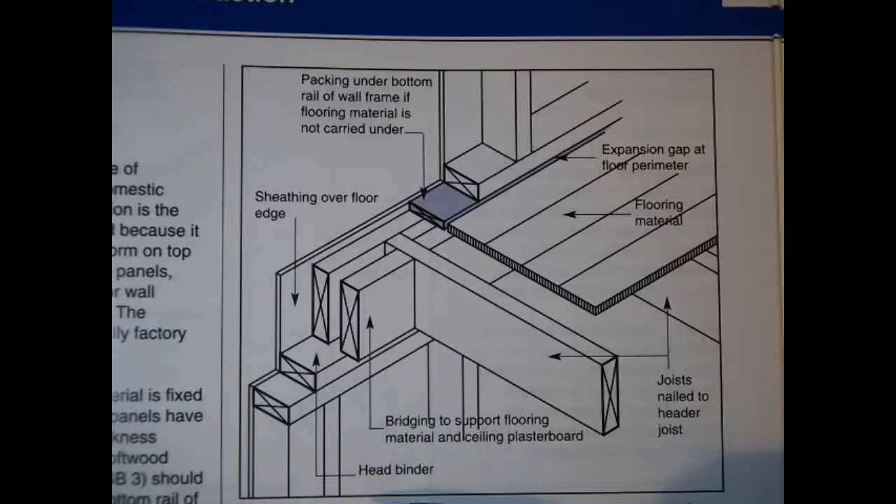So I'm going to start off looking at this three-dimensional image, which is very good for showing just how it all goes together. So we have our head binder, head plate, and we have our joist of the next floor, and you can see the sheathing is carried over the floor edge, resting on top of which we have, where the pen is now, our joist running to the header joist.

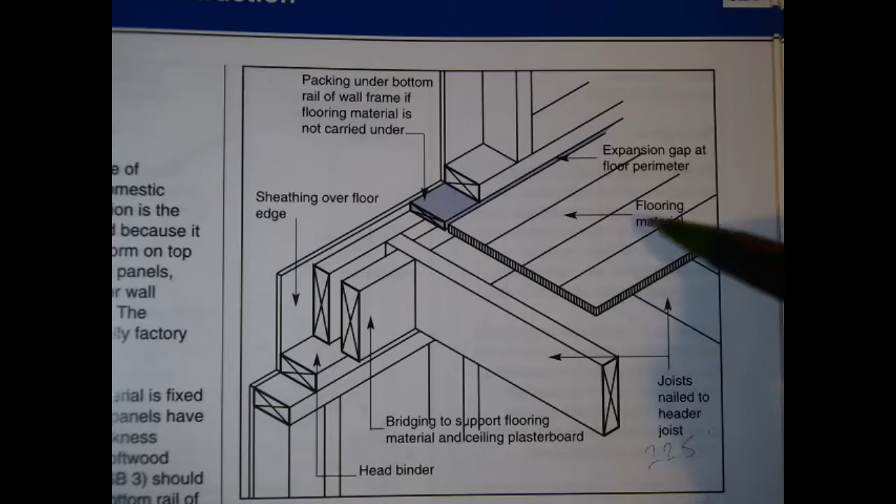Above that you have, well I'm showing it's 225 millimeters, which would be kind of standard. You've got a flooring material which could be tongue and groove, probably 18 millimeters in thickness, and if it doesn't continue out onto the edge, you can see there's a packing placed underneath the next timber frame above that. So very good detail here.

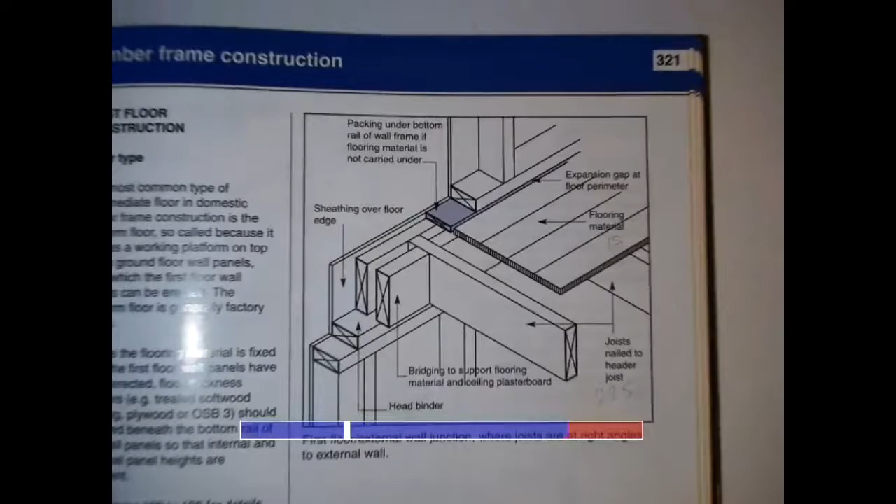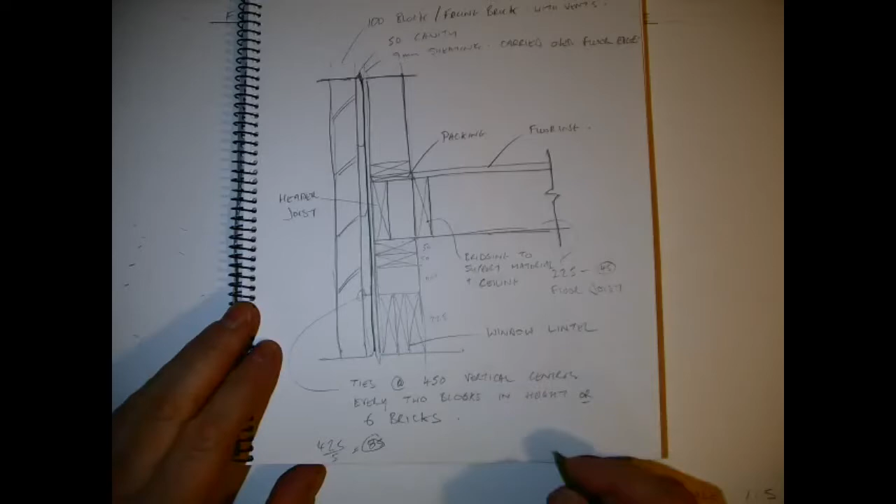If you need to go back to that there to take a look at it, it would be advisable. So starting off, what I'm going to do is I'm going to omit some details as well. In this I've got a sketch of how the whole thing would go together. You can see I want to draw at a scale of 1:5.

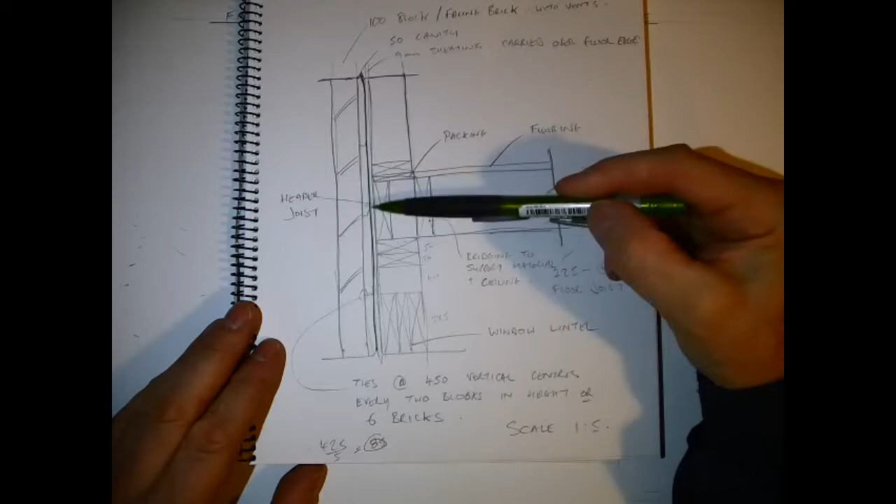The X's show the edges of the timbers, 100mm block or brick or whatever's out on the outside, 50mm cavity, our breather membrane or OSB board, and you can see each of these are shown in the three-dimensional drawing as well. Big difference here maybe would be that if there was a head of a window detail, there you can see I have drawn in the window lintel.

You may have that there, and I've put it in about roughly, I think it's 425mm from the bottom of the drawing on that there.

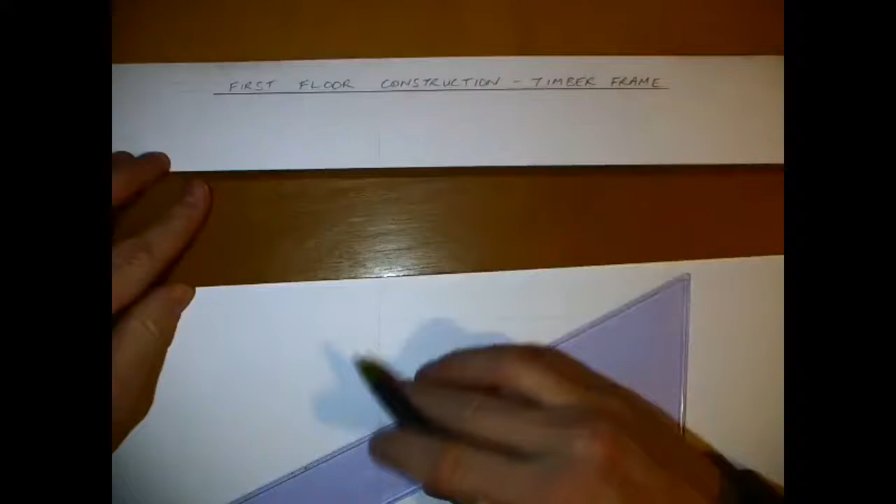So I'm going to start by drawing the timber frame itself and the OSB board on the outside of it. I think I measured up 85mm from the bottom line to the bottom of the ceiling joist, and it should give me plenty of room to draw in my lintel detail.

A lintel could be placed just directly underneath the floor as well, if there was, depending on the height clearance it would be on that.

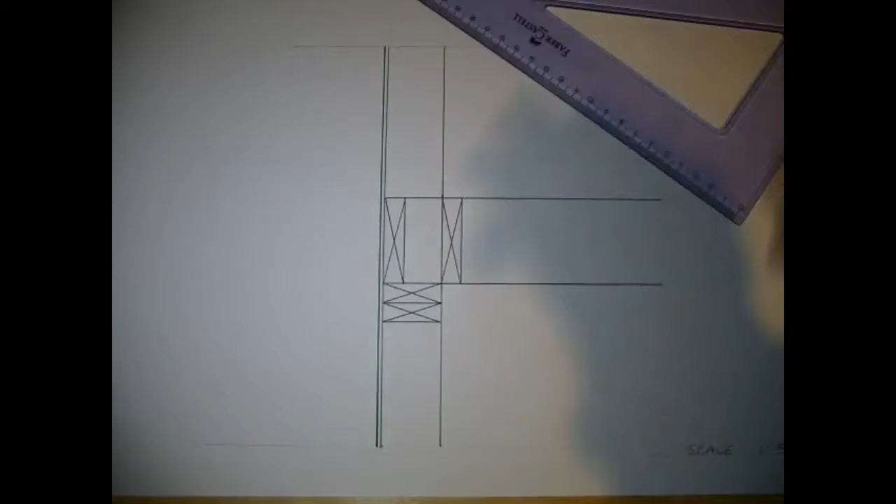So my headers, my head plate, my binder plate, and you can see the trim rafter on the trim joist above that, and we've got 3 making up the 150mm thickness for our timber lintels shown here below that, and I really only have a space of about 100mm, so I think it's 20mm between it and the head and binder plate.

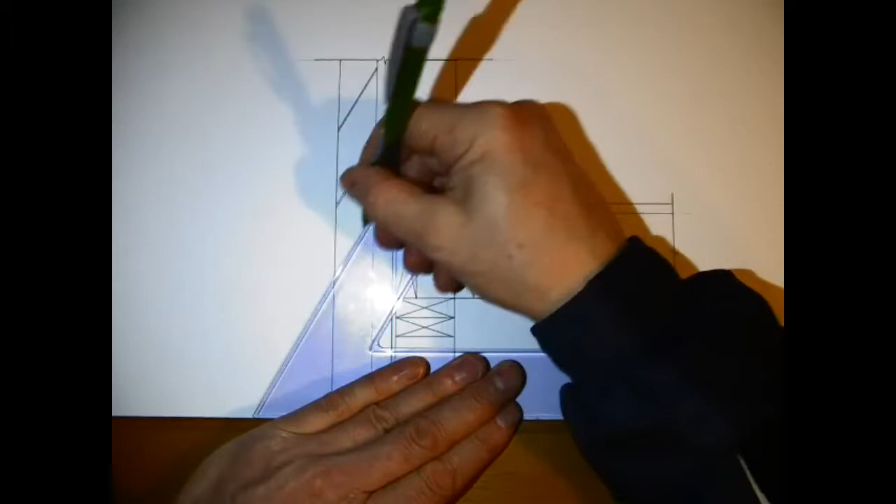Drawing the block wall on the outside here, and have my floor and my packing piece shown as well, and I also need to put in 50mm off the bottom of the stud and the top level. I've forgotten about it here, and I'm heading into the details.

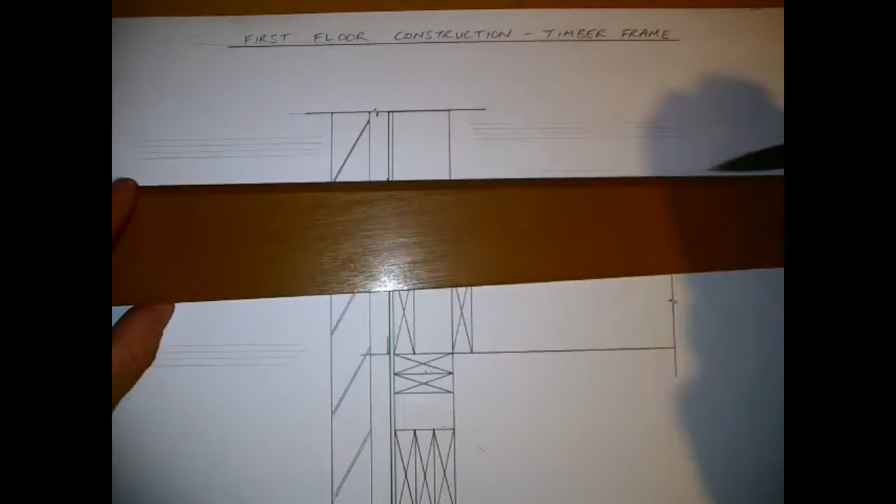I can always go back to that, and I'm drawing in a detail as well too of the tie, and I've used a colour for the breather membrane on the outside. So every 450mm, or every 2 blocks or every 6 bricks, you would have to have your wall tie.

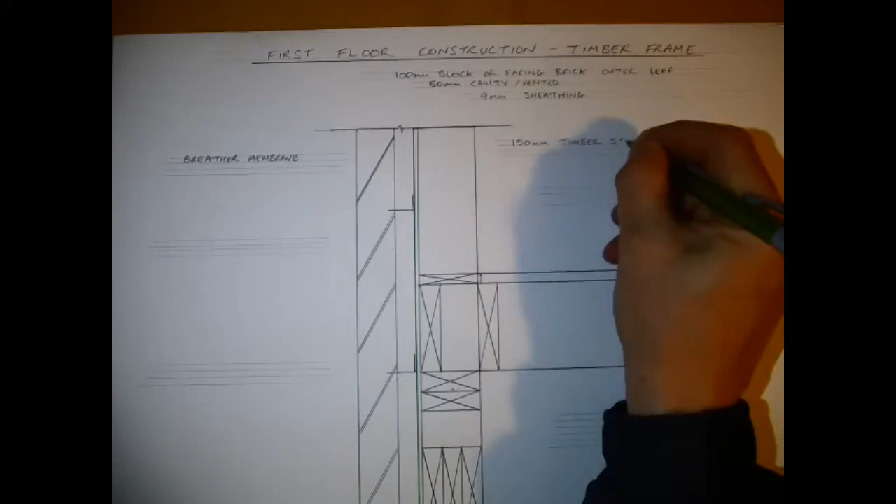I haven't shown them going terribly far into the wall, and again, to keep just for clarity in the drawing, I have not included a service cavity or any of the internal pieces in this here, so that we can just focus on how the arrangement of the timbers would be in the drawing.

It doesn't really matter how far I go out with the ceiling joist here either, and all the details are being drawn in here. I've got my bottom of my stud frame continuing on up here now. Pause it at the end and take a look at all the details, and when you're filling these in your own drawing, that's the way to go about it.

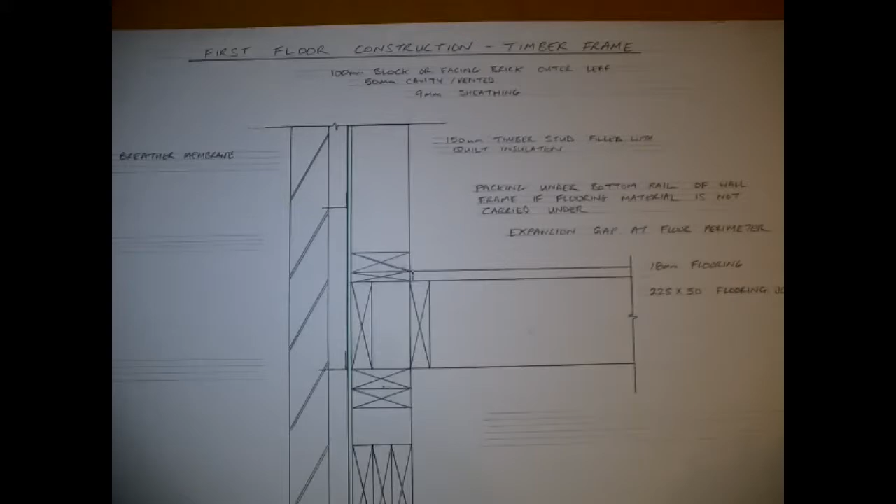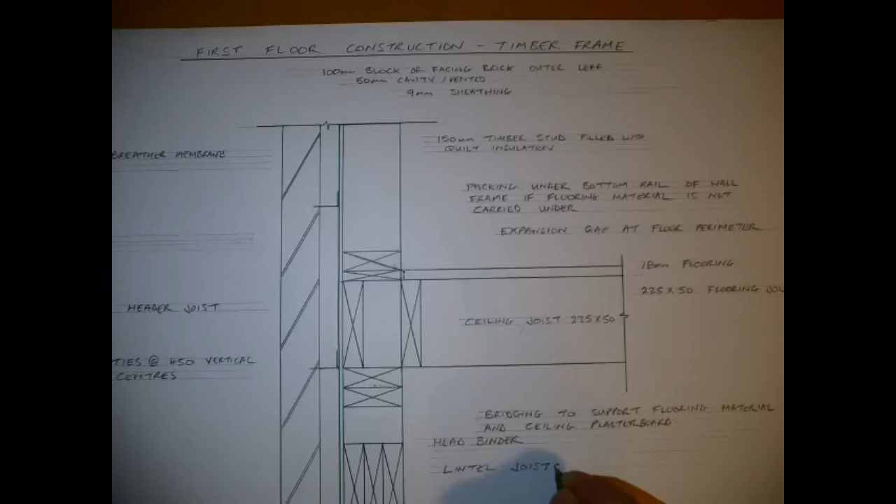One little detail there on the ceiling joist, where the edges are, I'm just after writing it in there, the bridging support - it supports the last flooring board on top, and if you had a ceiling, your plasterboard ceiling would be fixed to that, or your service cavity. It also gives support to the edge that would be fitted into that as well.

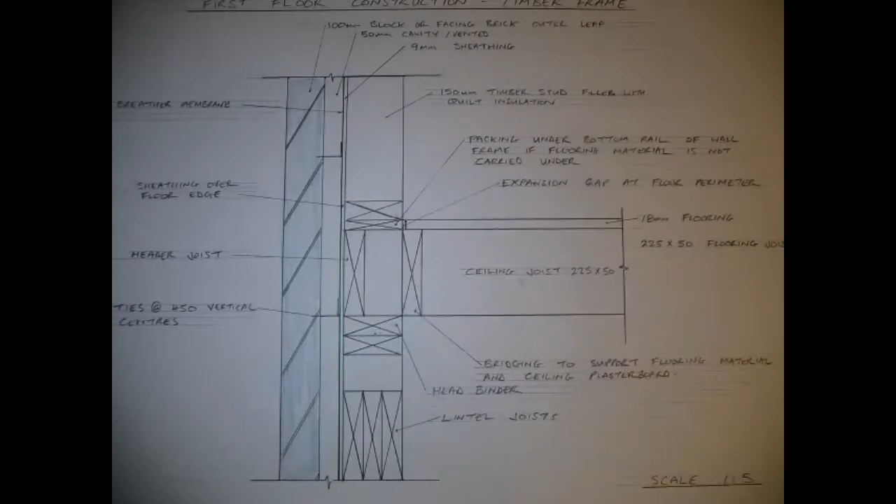A little bit of colour, as always, helps lift the whole drawing off the page, and I haven't included any insulation in this here. Just again, the colour will do, rather than going through all the detail, just to show that that's the placing where the insulation would be.